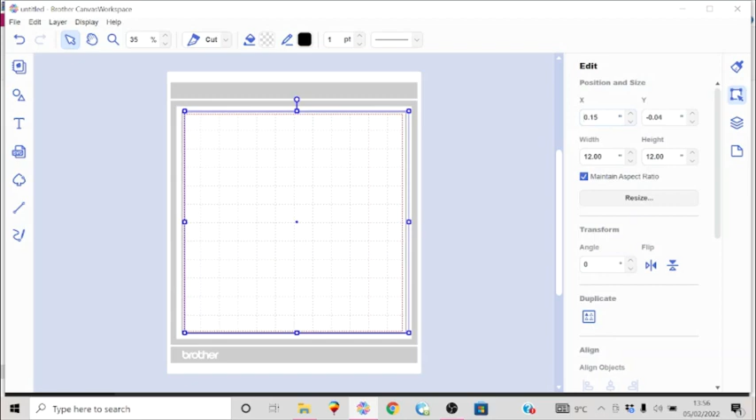Go back again, do that. We zoom in, we'll see that that is beyond the cutting area, which is this red dotted line here. The cutting area for the machine is actually 297 millimeters, which is 11.69 inches. That's clearly too large for that.

So it needs to be no more than that, and that's really taking it right to the very limit. So you can't be any wider than 11.69. I'm going to reduce this 12 by 12 to a more manageable size, but I'm not going to reduce it until I've completely followed all the guidelines in the pattern that I'm following. So all the cut lines, all the score lines, everything will be completed first.

Then I'll select everything and reduce it. I'm going to resize it to 96%, which will bring that, and if I just do that now, I'll show you. So we've taken it down by 4%.

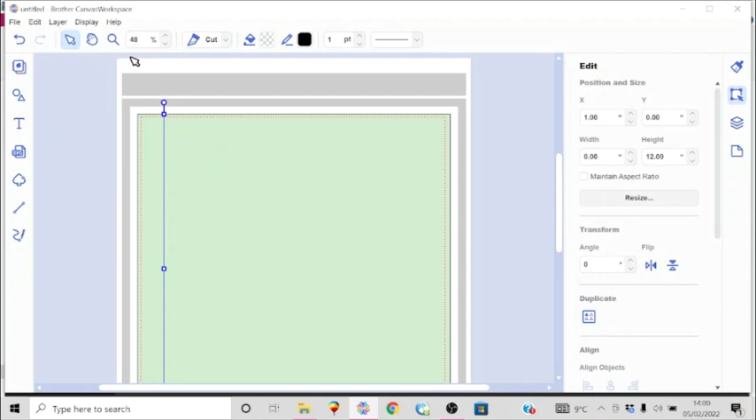So this first score line now needs to be turned into a dash pattern so it doesn't completely cut through. I'm just going to put these score lines in, using that third one down. We want to place that in position.

So just highlight it, go to edit, and then place it at 0.75, which is 3/4, and at 0. So it's at the top, and it's 3/4 of an inch in from the left.

The next score line is going to be at 2 3/4. So duplicate your score line, change the position to 2.75 and 0.

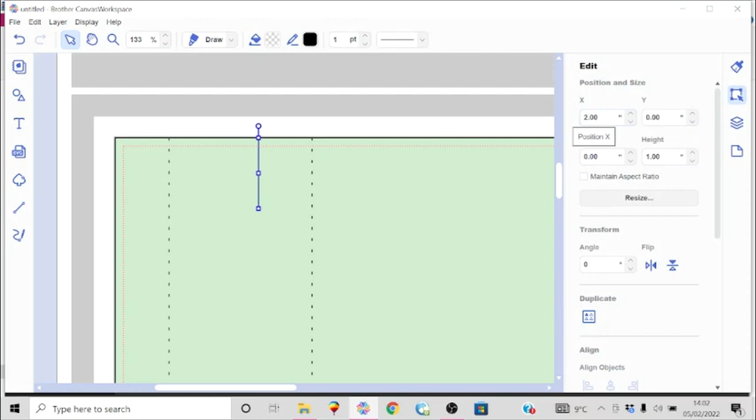Now I'm also going to put a little tick mark in here as a reminder of where I want to take a piece out of this, because we're going to cut out the top portion of this base. I'll actually turn it into a draw so I'm not accidentally cutting that out, and I'm going to place it at 1.75, so 1 3/4 of an inch. It will all become clear in just a little bit.

So I need to do these same measurements but on the right hand side of this piece. I'm going to duplicate that score line and place this again - it's going to be at 0, and it's going to be at 9.25, so 9 1/4 inches, because that is 2 3/4 inches from the right hand side of this 12 by 12 sheet.

Duplicate that and place the next one at 11.25, 11 1/4, which is 3/4 from the right hand side.

I'll do the same with my little tick mark here. I'm going to duplicate that and move this to 10 1/4, because that is 1 3/4 inches from the right side. So we have this now.

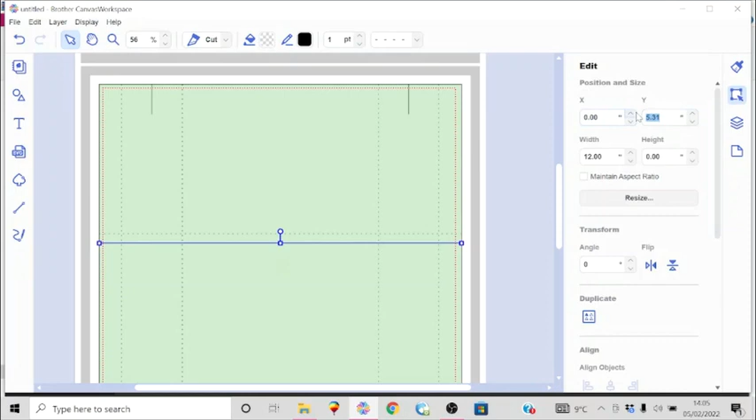The next one we'll duplicate - X will be 0 and Y will be 7, because it has a 2-inch base, so this is 2 inches here. So those are all the score lines that we need for this. Now, as I said, we're going to do some cutting away on this top portion. The bit below the 7-inch score line is going to be left intact just as it is.

So what I'm going to do is bring in another square that I'm going to resize. I'm going to resize this to 1 3/4 in width, which makes it the same as that tick mark we had there. I'm going to take this snapped grid off for the moment. I want this also to be 5 inches in length. So the width is 1 3/4, and the height is 5 inches.

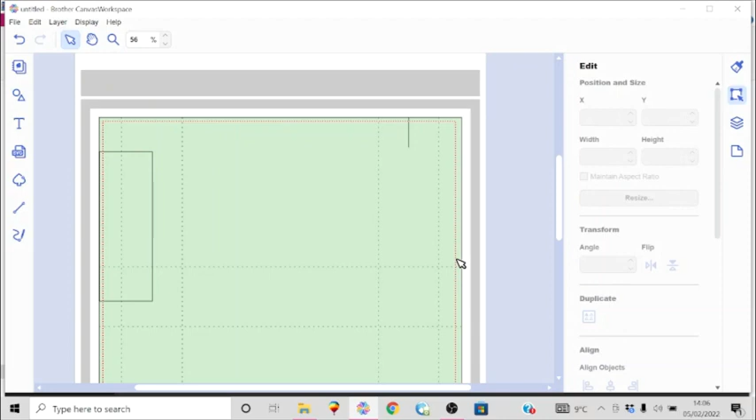So now I can just delete that because I know where that needs to be placed now. This is going to go up here into this corner, so that means it's going to be 0 and 0. If you want, you could even give that some color so you can find it easily.

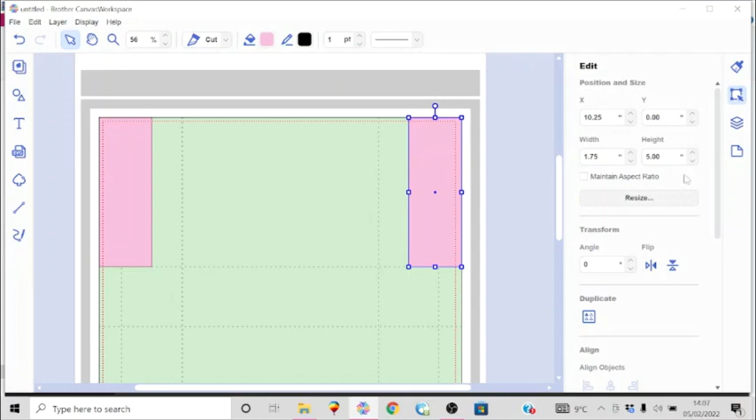I'm going to cut this out as well, so I can delete that. I'm going to duplicate this, bring it over. We're going to put it at the 10 1/4 and 0. Now, we're also going to be cutting this portion out, but I'm going to do that separately after we've done this.

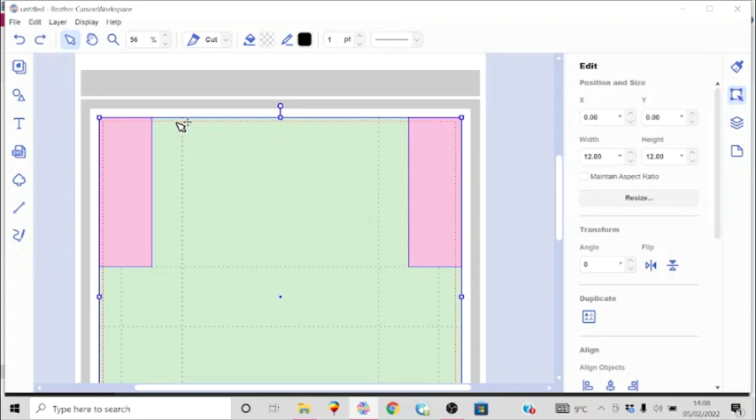So, to be able to subtract these 2 rectangles from the back piece, we've got to unlock that. If you click here - just be sure that's in place, it is 0 0. You can see the green is highlighted up there, so we know it's unlocked. Now we're going to select these 2 shapes - we've got a blue box around that, a blue box around that, and then a blue box around the entire shape. We don't want to select any of the score lines, because we won't be able to cut out or punch through those.

So we'll go to Edit, Process Overlap, and Subtract. So now we have this. And if I take that and place it to the back, you'll see all the score lines are still there. Let's just double check it's still in place at 0 0, and we're going to lock it back again.

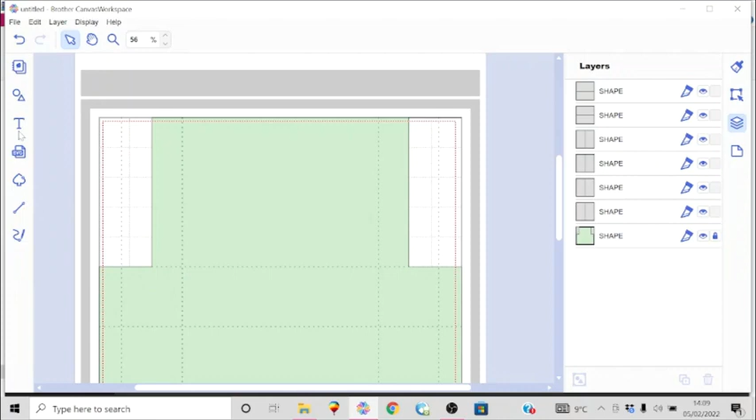Because now we want to bring in a rectangle that will cut this piece here out, and this piece here. So this is 3/4 and this is 2 inches. So we want a shape that is 2 3/4 inches wide and 2 inches high - 2.75. Right, that is going to go here.

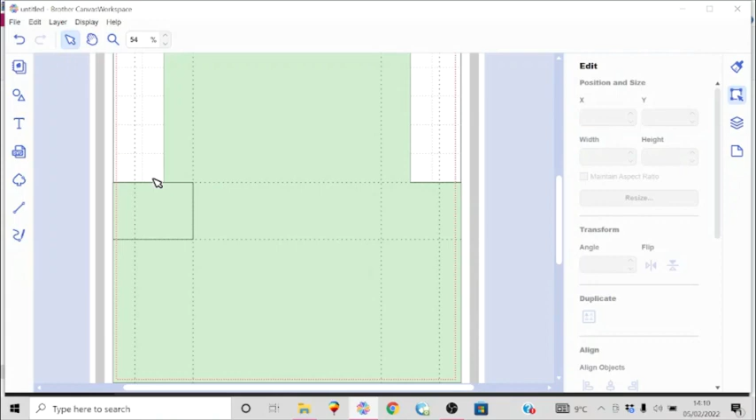So it's going to go at 0, and it's going to go at 5 inches. Again, I can just give that some color. Put that back into place. And we're going to do the same over here, so we'll highlight that, duplicate it, and move it.

To 5 inches and 9 1/4.

Right, so if you look here, you'll see that if you follow that score line all the way down, it's going to go right through there.

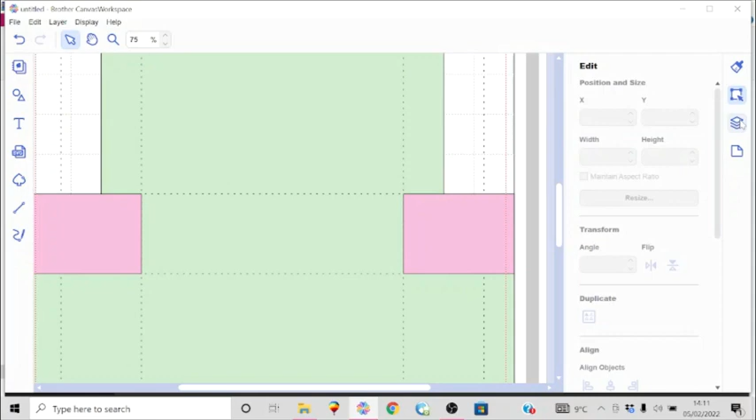So again, back to layers, unlock this piece here, select your 2 rectangles, and you can see the blue boxes around those.

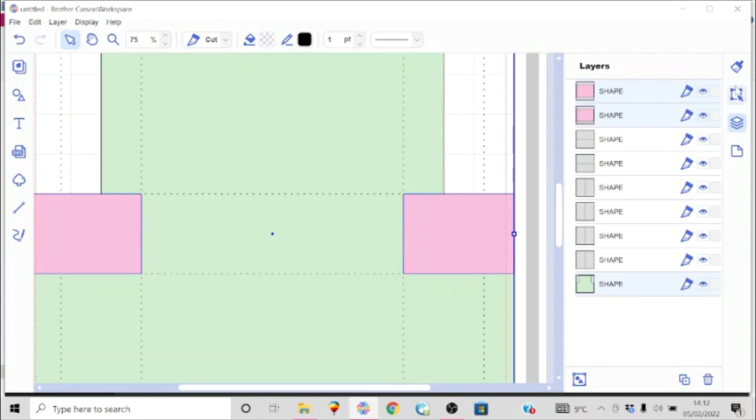Go to Process Overlap and subtract.

Send that back to the back of this. And I'll lock that back again. Let's just be sure it's in the right place. Yes, it is. And we'll lock that back in again.

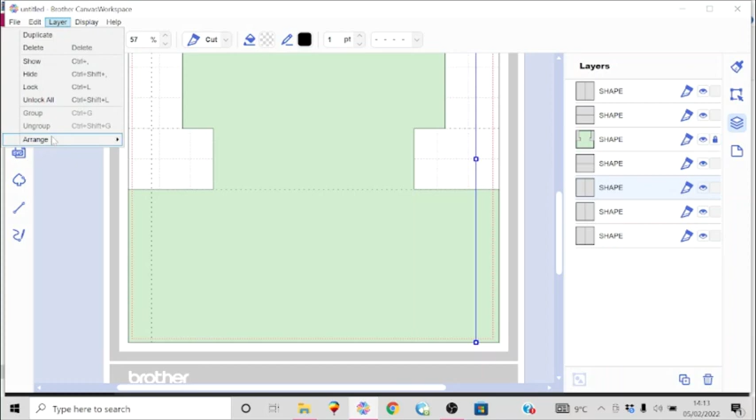So we have these sort of stray score lines here. Let's bring that to the front. Now you can just leave them as they are, because it's really not going to make a lot of difference on the mat. It will cut, but it will, of course, not cut it through. But if you like, and I'm going to do this, just going to grab that and pull it down and resize it.

Okay, I'll do the same here. This piece.

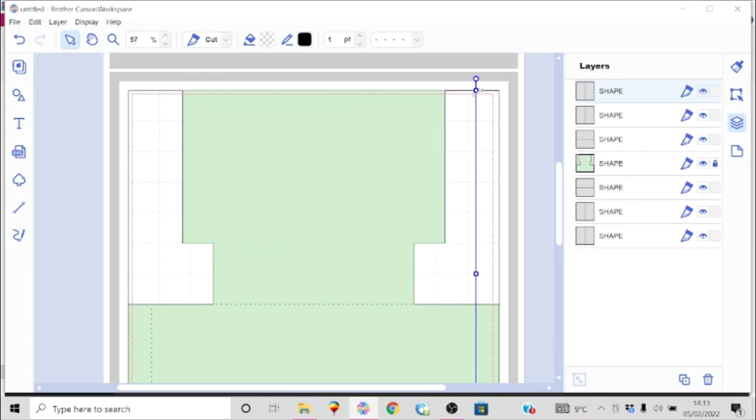Now for our lid, we want to make that 1/8 of an inch larger than our base. And remember, our base is 2 inches in depth. So we want to make this 2 1/8 inches rather than 2 inches.

So we'll start with the basic shape of this, which is going to be in width, it's going to be 10 7/8, so that is 10.875. And the height is going to be 6 3/8, so that's 6.375.

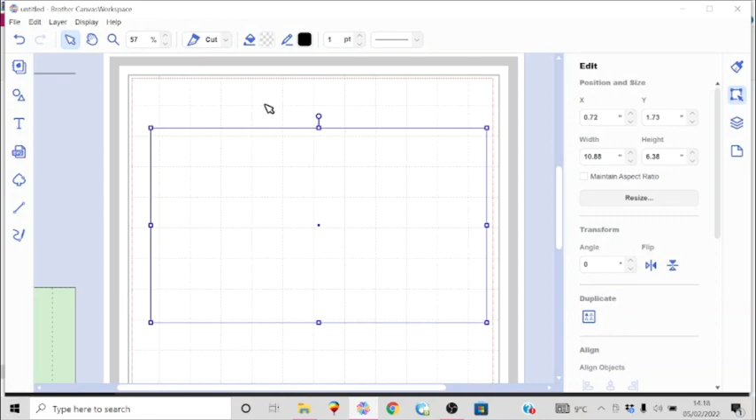Give it some color. And I'm going to place that again in the corner of the mat at 0 on the X and Y axis. And I'll lock this into position like so.

Now, for this, we're going to actually make tabs in each of these corners to bring in a square that is 2 1/8 inches. So 2.125, which is 1/8. 2.125.

That is going to go into the corner here. That's going to be on this corner and then the bottom two as well. So that will go at 0 and 0.

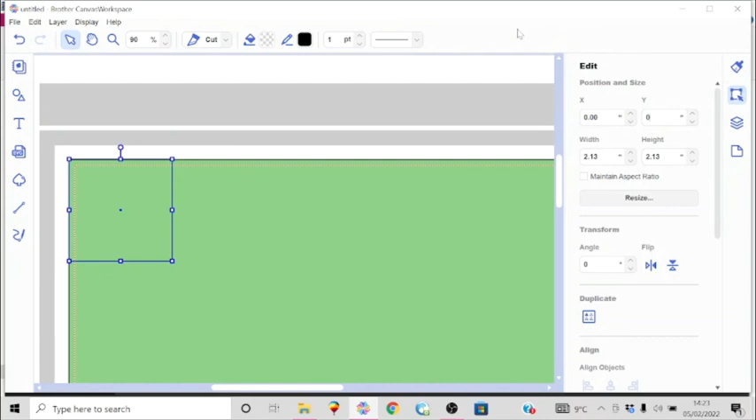Next, I'm going to double click on that and expose the node. So I've got the path editing tools, and I'm going to remove this point here, because when I remove that point, it's going to shift this line over to here and form the triangle. So there is my triangle.

If I just give it some color, you can see. And it's here in the corner, or it will be in a moment. So I'm going to place that in that corner.

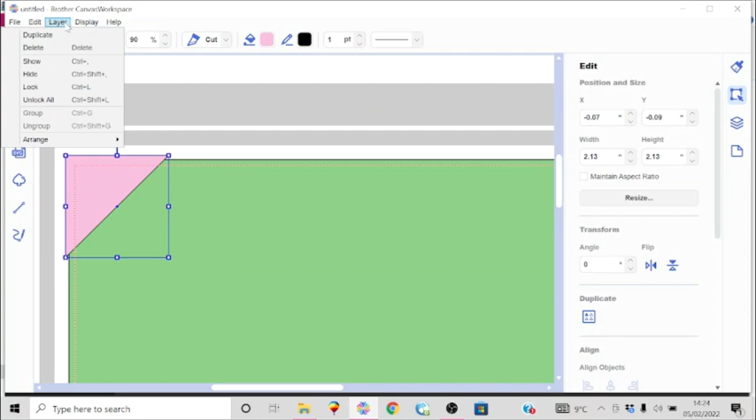But I'm also going to duplicate it, so I've got it available for the other side. And on this side, we want to flip it over so it's mirrored. That's going to go over there. So this one we'll place first at 0 and 0.

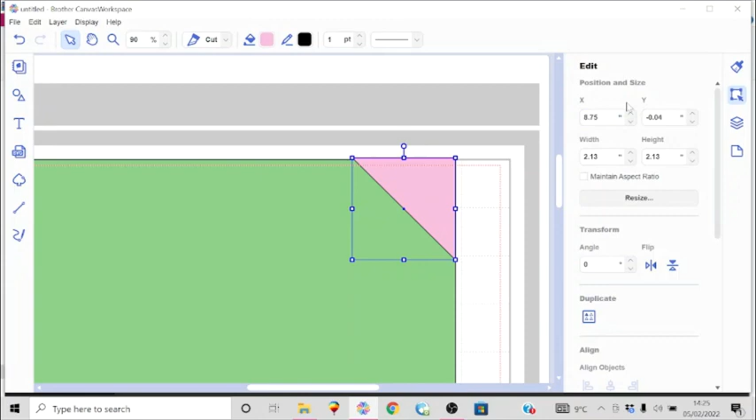This one is going to go at 8 3/4, so that's 8.75. And 0.

What I can do now, though, is to go ahead and select both of these. And duplicate them. Just group them. We'll have them for the bottom down here. So I can flip them vertically.

That one is 0 and 4.25. And so is that one. 4.25.

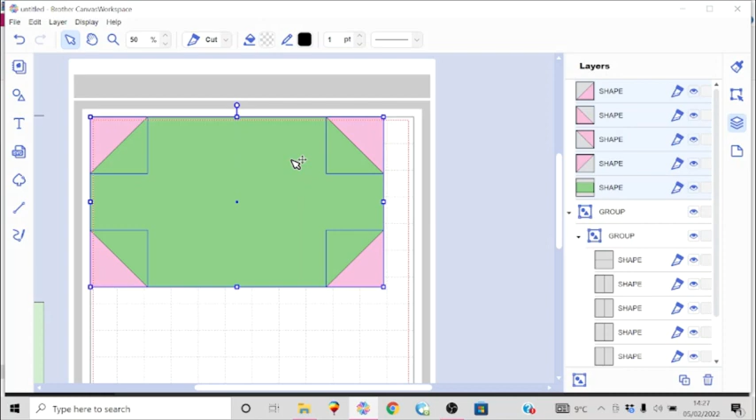Right, so we have those into the corners. We can then unlock the background, select it, go to Process Overlap, and remove those corners. So these have now been removed.

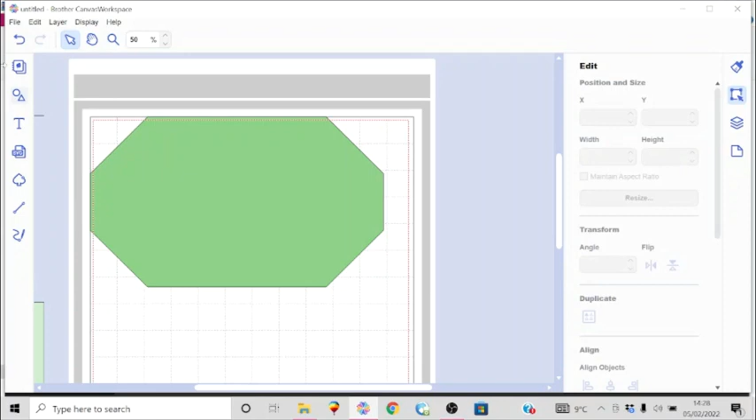So we can put our score lines in next, and we'll make sure that this is still in the right position. Lock it in place. And then I'll go back and put my score lines in. You could do the score lines first if you wanted and then cut out the corners. Either way, it will still work out exactly the same.

So now we want to put in our score line 2.125, which is 2 1/8 inches. And in fact, all the sides will be scored exactly the same. So I can use my path tool here.

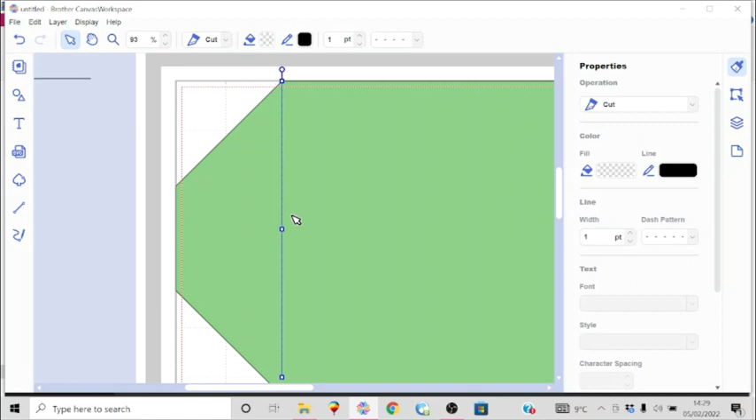I'm going to place that at 2.125 and at 0. Make it a dash pattern. You can make that a bit longer. 6 3/8, so 6.375.

Right, so that is our first score line. I'm going to repeat this. So we'll duplicate it, and we're going to take it to the other side. That is going to go again at 0 and at 8 3/4. So 8.75. Those are the vertical score lines.

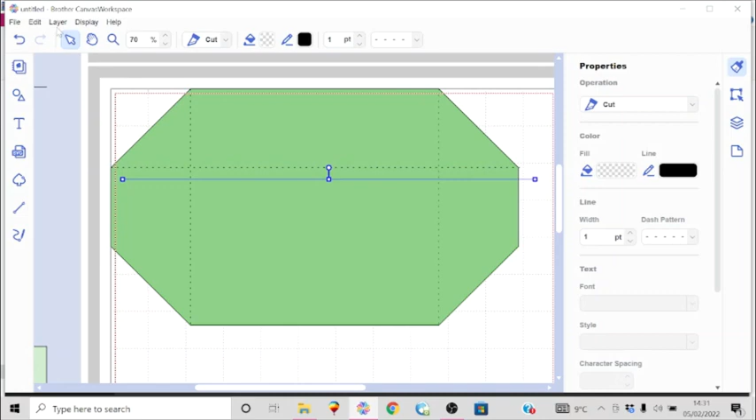The vertical score lines, those are the vertical score lines. The horizontal score lines are going to be at 2 1/8 and 0 for the X. Repeat that. Actually, let's go ahead and make it a dash pattern first. And then we'll repeat that. And place it at 0.

And then we'll move this. Take that off. So this is going to go at 4 1/4, 4.25 and 0. Right, so there is the lid so far.

Now we need to put a cut line here because we've got to free up this tab. So we want a cut line here, we want a cut line here, and we want the same on this side. So that will free that tab up.

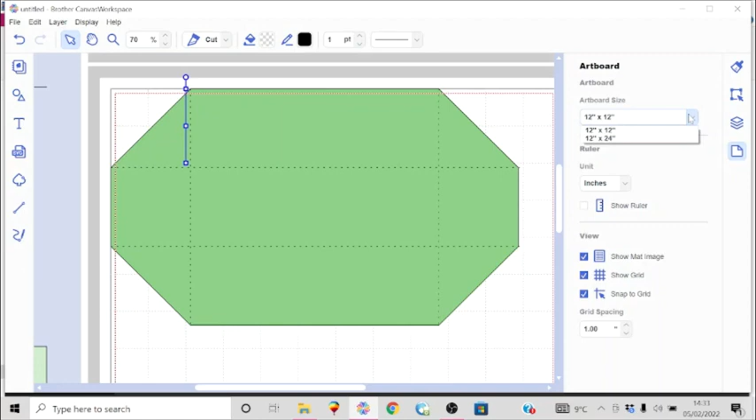So this edge here is going to fold over inside like that. So I'm going to make another score line, or use the path tool again, to make a straight cut line. And that's going to be 2 and 1/8 inches in depth, so 1, 2, 5.

That's going to move into where this score line is at the moment. So how I think I'm going to do mine is I'm going to go ahead and grab that score line and pull it in so that it's underneath this set of score lines, this score line here.

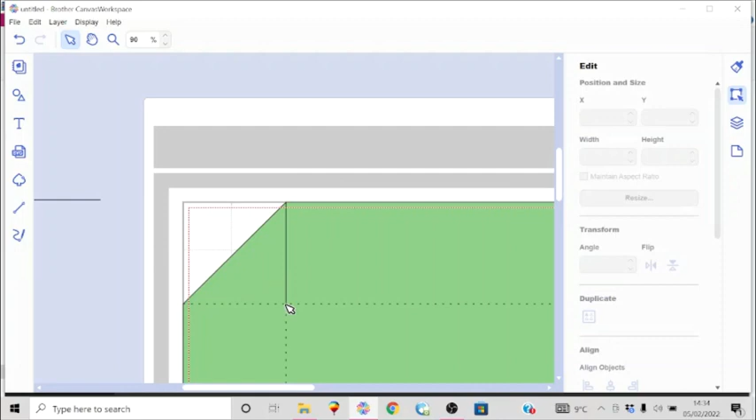So then now I can move this into position, so it's 2.125, and that will be my cut line. So it's going to cut right through here and stop when it gets to the 2 1/8 inch score mark.

So we'll do the same, duplicate that. And I'm going to move it down to here so I can go ahead and reduce that. Pull it up. Doesn't have to be exactly the 2 1/8, but just so it's in between there.

This is going to go four, 2, 5... 2.125... there we are, 4.25.

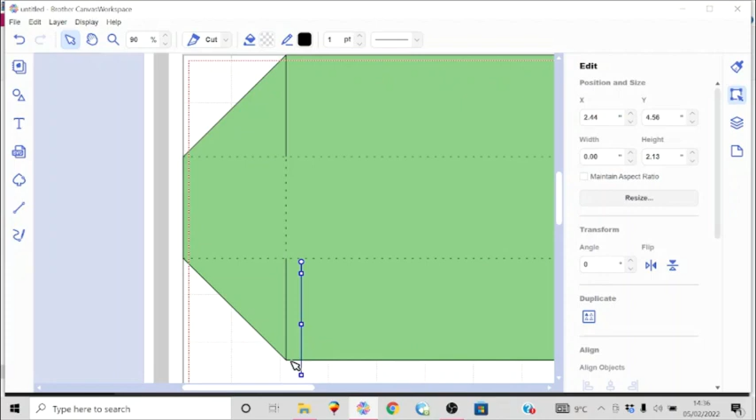So this is going to be 4 1/4, and the X is going to be at 875, like that. So we can go ahead and move that dotted line up. We'll move it down here.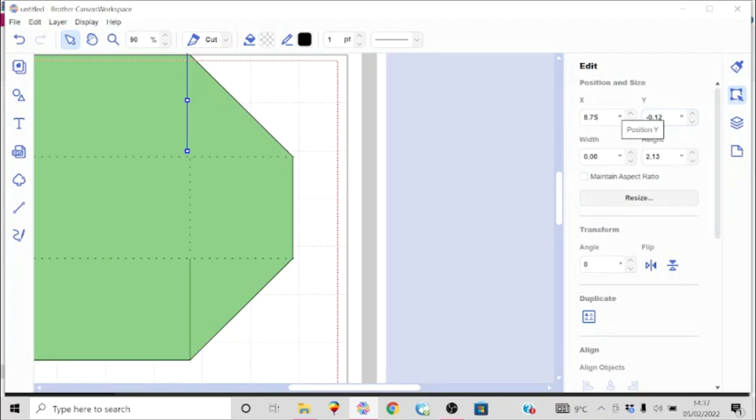And we can duplicate this one. It's going to go here at 8.75 and 0. There are all our score lines and cut lines in place.

Just going to cut here, here, here, and here. And then the rest will all be your folded score lines. So you want to just go ahead and group all those together. And then I'm going to unlock the shape.

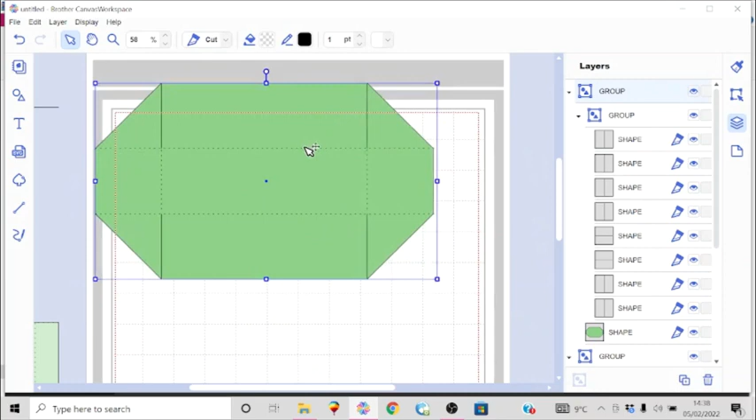Group those, and we have our lid. So we just move that off to the side.

Next is the large pocket, and that is going to be a piece that measures 8 3/8, so that will be 8.375, and it's going to be 4 inches high. Get that color again.

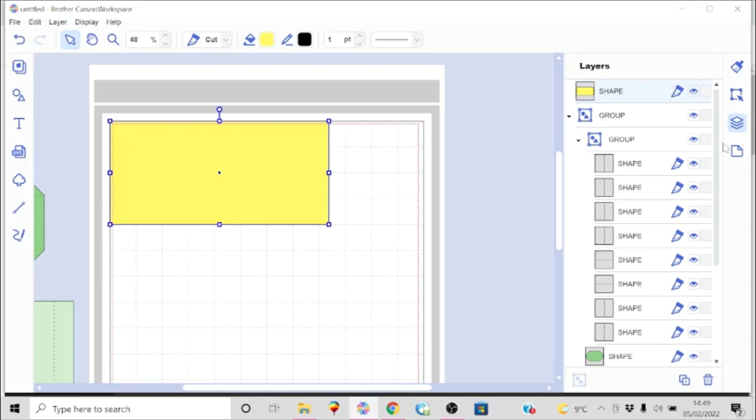So let's give it something else instead. Then we'll place this at the corner and lock that in place. Then I can go back and do my score lines now.

This has just 3 score lines, and they're going to be on 3 sides. So there'll be a 1-inch score line at either end, and then on the long side here. So we're going to make our first score line. It's going to be another dash pattern, and that is going to go at 1 inch.

We'll duplicate that, and we'll put it to the other side, which is 0, and that will be 7 3/8, so 7.375.

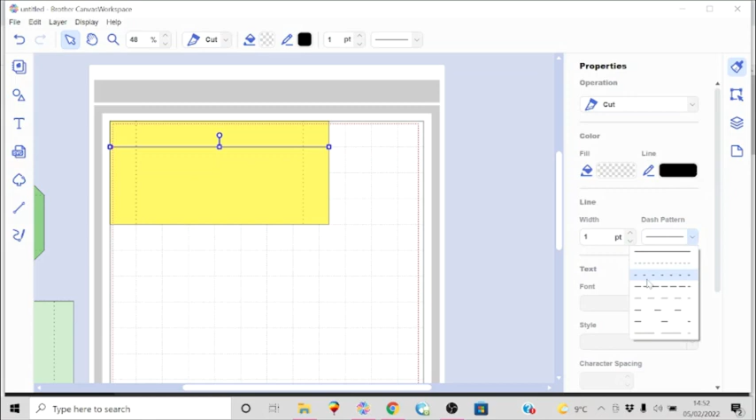To draw a horizontal line, that will be at 0 and 1 inch, or you could put it down here, in which case it would be 3 inches. It's just... 8.375. That is also going to be a dash pattern.

Right, so far we have that. Now what we want to do is actually chop out these 2 corners here. So those are 1 inch. So we'll bring in a square, resize that to 1 inch.

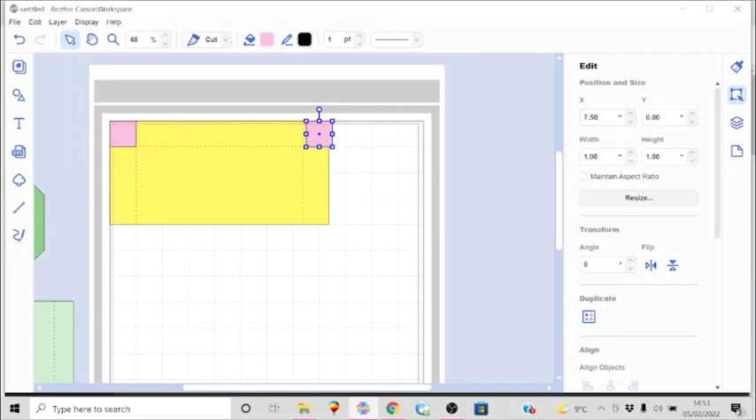To place that in the corner, take that snap grid off. So 0, 0 is where it's going to go. Give it some color so we can see it. I'm going to duplicate it, and I'm going to put it on this end, again at 0, and at 7.375.

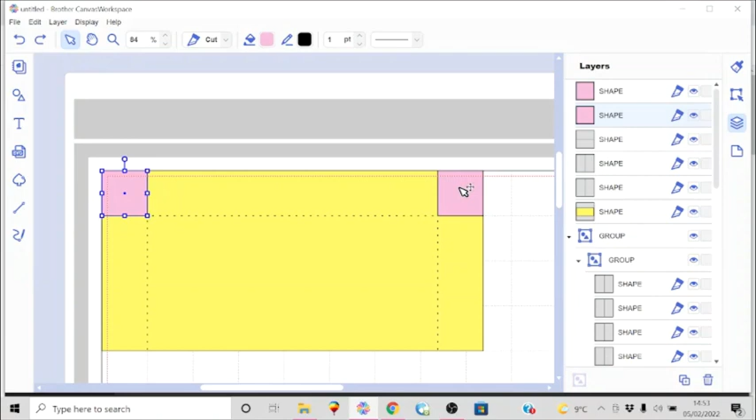You can see that now. Go to layers and unlock the shape. Then we can select these. And our shape for our pocket, and we'll go to Process, Overlap, and Subtract. So when you send that to the back now...

See these score lines, and this score line actually is extending. Just lock that back again. That score line there is still extending beyond here. So if you want to, you can just pull that in so that you don't have that trying to cut through there as well.

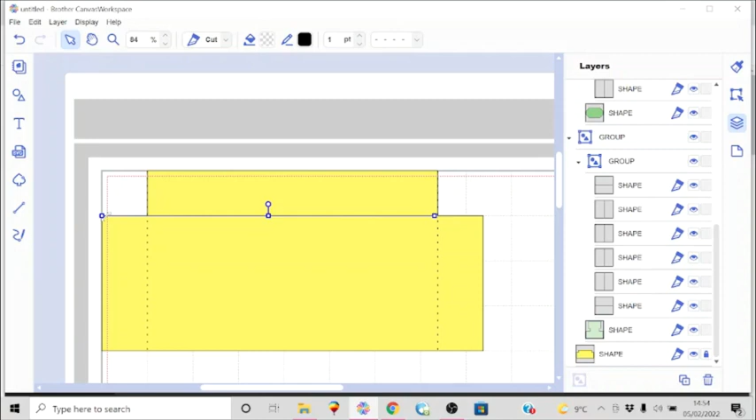So there we have our shape. We can group all our score lines, lock that, and then group all of our large pocket. So that's the large pocket done, that quick. Next is the medium pocket, and the medium pocket measures 5.5 by 2.5.

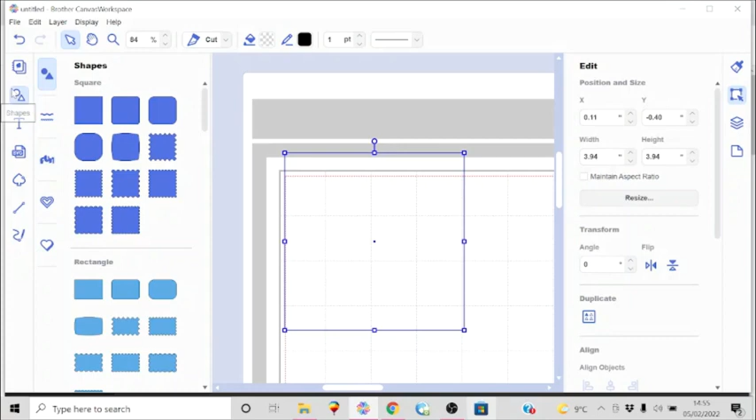We'll go back to Edit, bring in our square. I'm going to change this to 5.5 by 2.5. Again, we're only going to score on 3 sides, but in this case there will be 2 score lines, one at 1/2 inch and one at 1 inch. So let's give this some color.

Place that at 0. Okay, and lock it. Then we can bring in our score lines. Make that 2.5. Right, that is going to be a dash line.

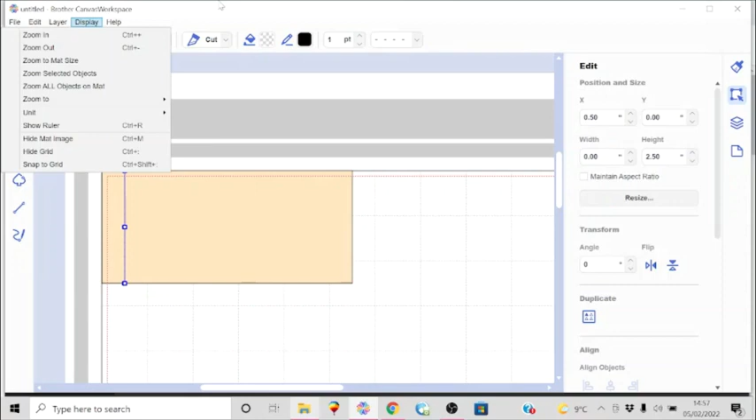We're going to place that at 0.5. We'll duplicate it. And the second one is going to be at 1 inch, so duplicate and place it at 1 inch. Then we will duplicate that. I'm going to bring that over to the right hand side, and that will be, since this is 5.5, this will be at 5.

Duplicate that. 0 and 4.5. Right, so we've got 1/2 inch, 1/2 inch, and another score line at 1 inch.

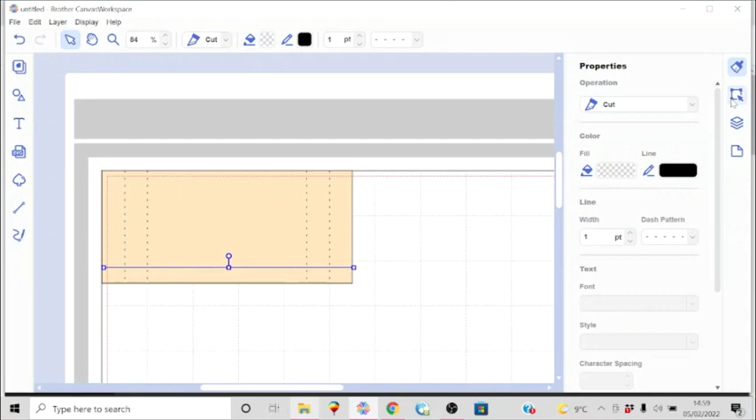And then for the other side, we simply want a 1/2 inch, so we'll turn that into a dash line, place it at 0, and this way I just put it at 0.5. So it's there at the 1/2 inch mark.

So again, we want to take this portion out so that we can make these. This will just be a tab. This will be a tab here. So for that, I'm going to bring in another square and resize that to 1/2 inch in height, and... oh, I'm sorry, 1 inch in width.

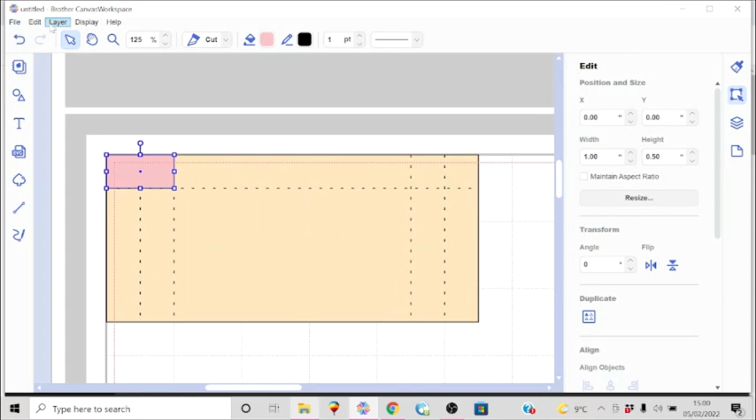There we are. So that's 1/2 inch, 1/2 inch. That's 1 inch there. And that is going to go at 0. Then we'll duplicate that, and we'll place that at 4.5 and 0. So into those corners there.

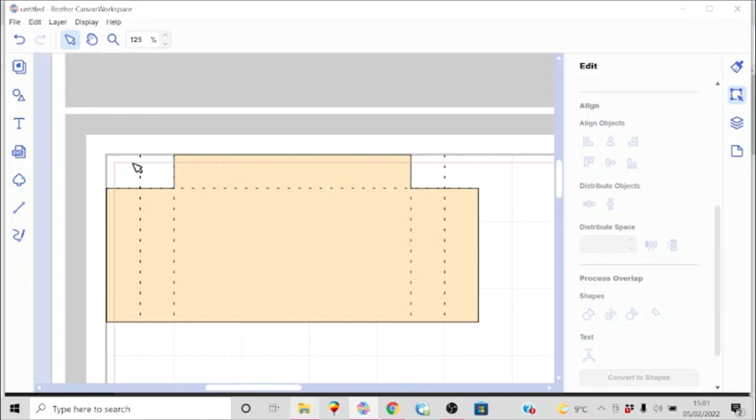Then we can unlock our shape. We can select each of these as well as our background. Go to Process, Overlap, and Subtract. So we can send this to the back again. And then we can lock that back down. Be sure it's still at 0. Lock that back into place.

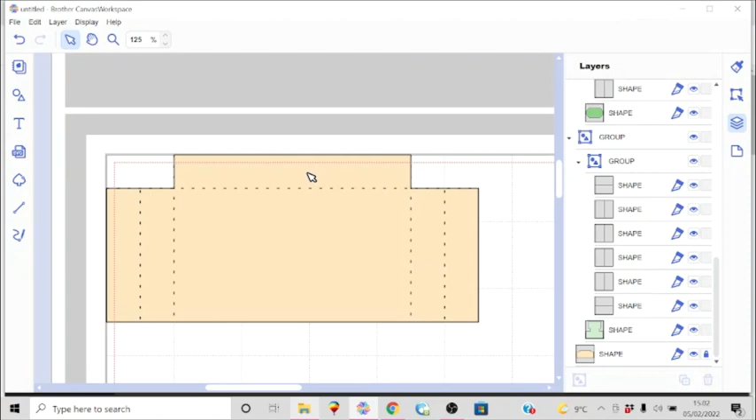I can grab these score lines and resize them so they're under there. Then I can select all the score lines, group them, unlock the shape, and now regroup everything again. And there is our medium pocket done.

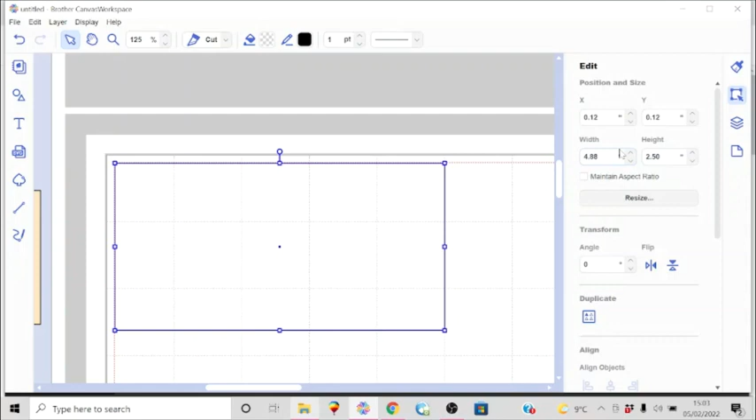So we have next a small pocket. That is going to be four and 7/8 by 2.5. So 4 and 7/8, that's 4.875, and 2.5 inches in height. So it's the same height as the medium pocket. Give it some color.

Place it at 0. And we'll secure it by locking it in place. And then our score lines for this are going to be the same as for the medium pocket, so that means 1/2 inch and 1 inch. So make that a...

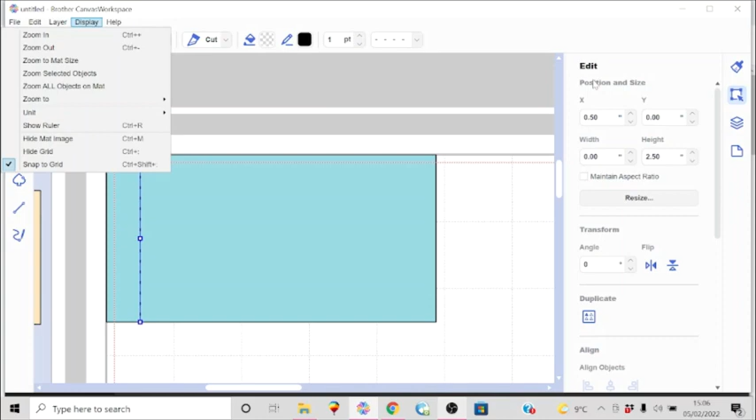Dash pattern, and place it at 0.5 and 0. There's our first score line. Then we'll repeat that and place that at 1 inch.

And we'll repeat that one. That'll be 4 3/8, so 375, 0, and then we'll duplicate that one and place that again, and 0, and then 3.875. So that's 1 inch and 1/2 inch in from either side. Then we need a horizontal line.

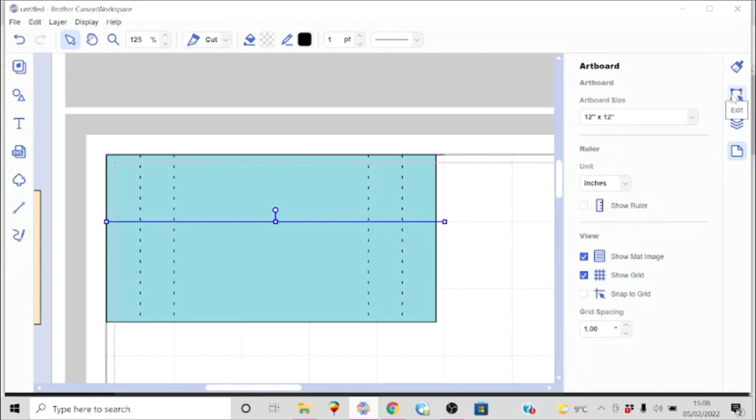Take that off. And that is going to go at 0.5. Make that a dash as well. Okay. Then we need to take these corners out again.

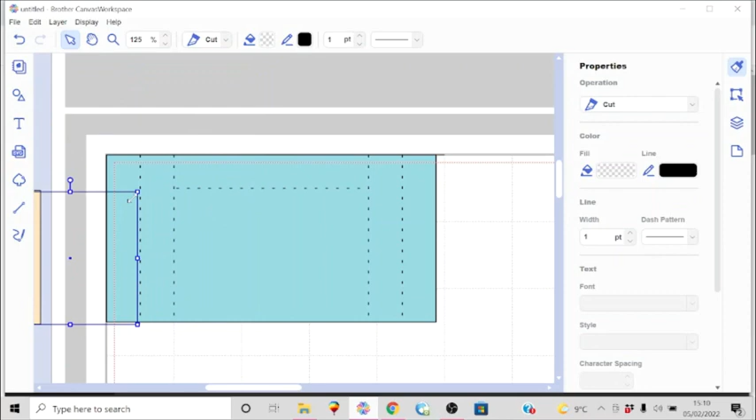We can go ahead and just move that in if you like. Bring in our 1 inch square. Actually, it's got to be one by 1/2 inch. Okay. And that is going to go in the corner at 0. And then on the other end, duplicate that.

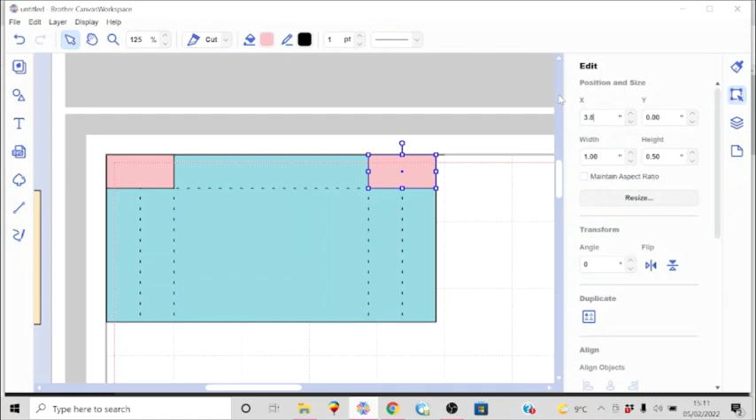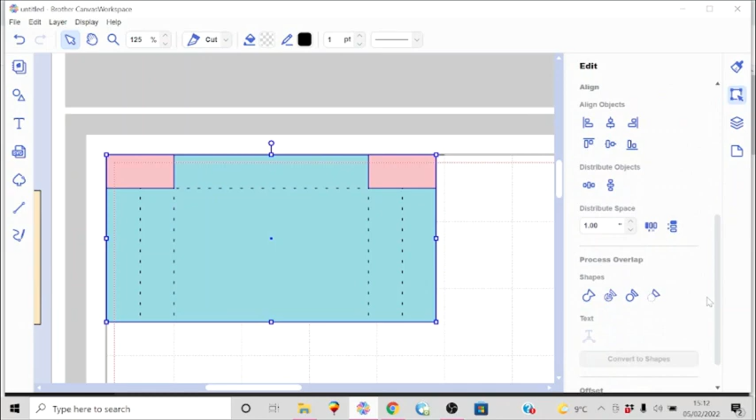Now we can unlock - maybe we didn't lock it. I locked that, let's get back here. No, it's locked, okay, so let's unlock that. You can always go up here as well and unlock everything if you want to, but I've already unlocked that now. So we'll select these pieces, we've got the blue boxes highlighted around each of those. Go to Process, Overlap, and Subtract, and then we can send that to the back.

I'm going to do back and lock it once again, and then I can move those score lines down like that. So now we can group all our score lines, unlock the pocket, and group everything together, and then we can just move that aside.

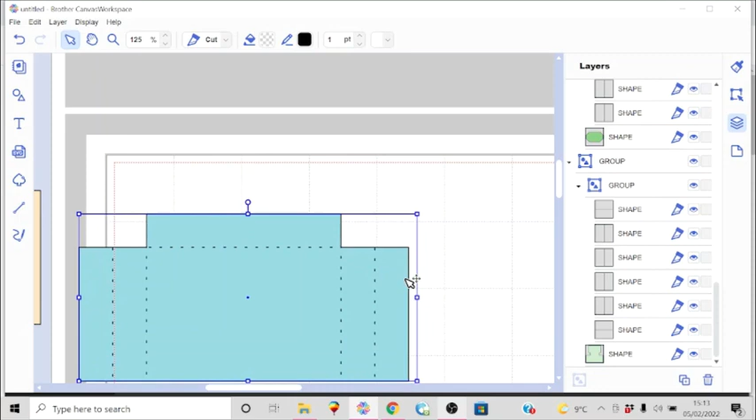Next, I'm going to make a little pocket that you could use to place stamps or just tuck in anything else that you wanted. So I'm going to bring in a square here, and I'm going to resize this to 2 3/4 by 2.5 inches in height.

That little bit of color as well. Let's choose that, we'll place that up in the corner again. We're nearly there, and I will lock that in place and then bring in these score lines. And again, this is going to have just 3 score lines.

So I want to place a score line at 1/4 inch on 3 sides, that is. So we'll place this one at 0.25 and 0. Make that a dash pattern as well. So take that off for now.

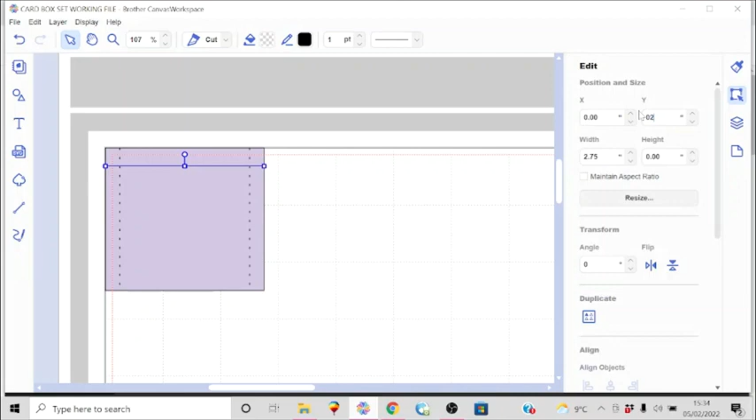And then finally, we need a line that is going to be at 0, 1/4, so 0.25. Like that, oops. Let's go ahead and change that to a dash pattern, and then place it at 0.25.

And then we can remove these pieces here, or you could just wait and cut them off when you get ready to put them down. But we can go ahead and actually make a little tab out of that.

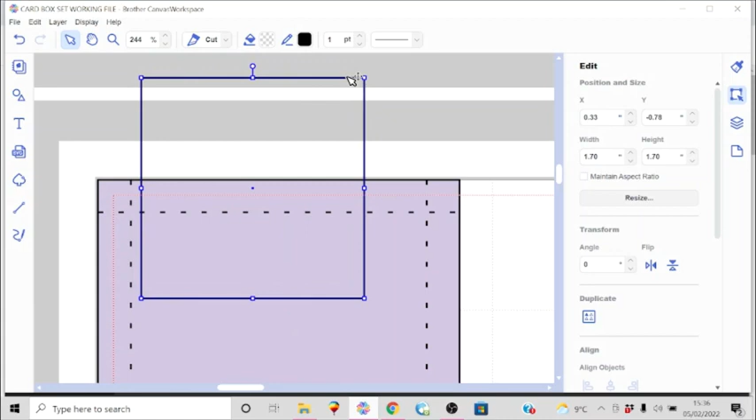So what we'll do is we'll bring in a square that is a 1/4 of an inch. That's going to go up here in the corner.

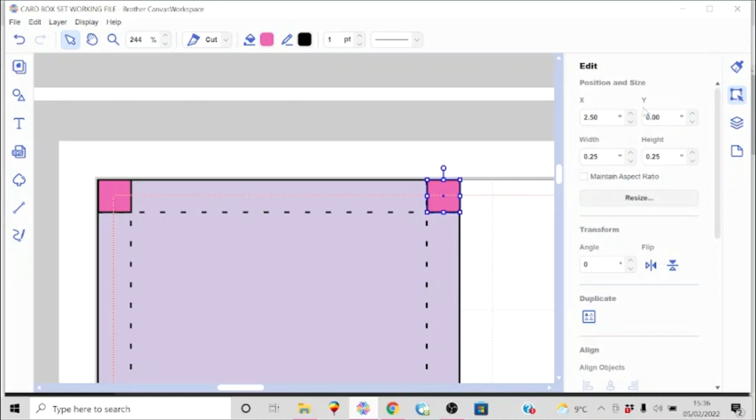Duplicate that and place that on the other side. And we can unlock this, and select, oops, those back, and go to Process, Overlap, and remove those little corners. Send that to the back, and then I can lock this again.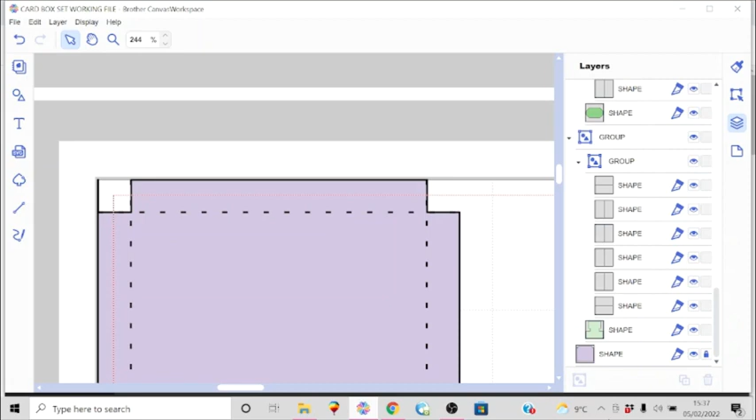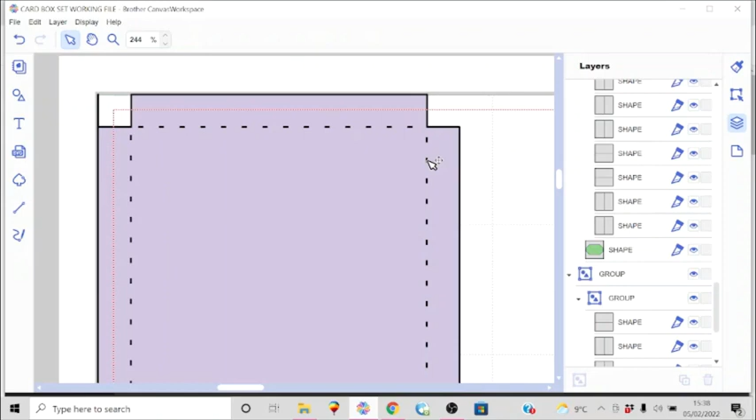And I can resize these score lines. Now we can also, if you wanted to, you could actually angle these now if you like. But I think I would just wait until I was ready to put them on to the base and can make the little tabs then. So I'll, oops, I'll move that. Just pull those down as well.

Okay, so that one should be ready. Oh, there is one more thing I want to do. I want to actually have a little thumb hole here, so it'll be easier to get in and out of this. So this is, as it stands now, the bottom of this little pocket. This will be the top.

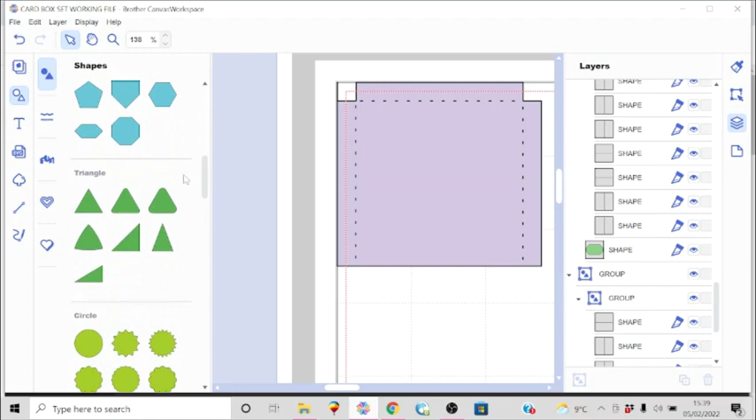I'm going to bring in a circle, should be fine. I'm going to resize this. About 3/4 of an inch should be about right. If you want to be precise, we can just change these dimensions.

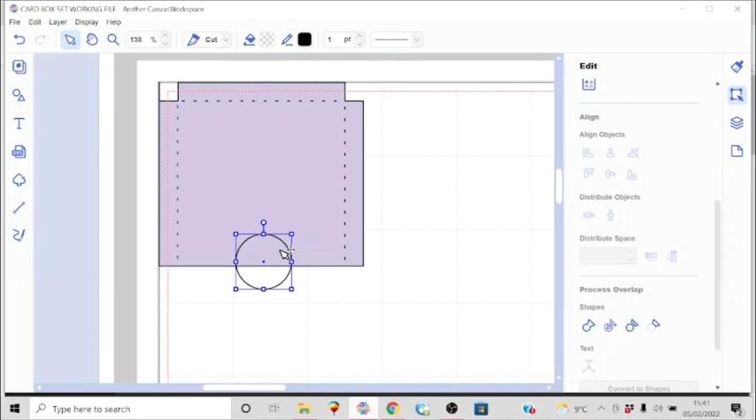I want it to go into the middle of this, so I'll need to unlock this for a moment so that I can place that in the center, and I think I'll try that again. About halfway down should be fine.

So we'll do this, make sure that's in the center, and then I can cut that out. I'll lock this down again. Actually, before I do that, I want to send it to the back. Lock it. Then we can

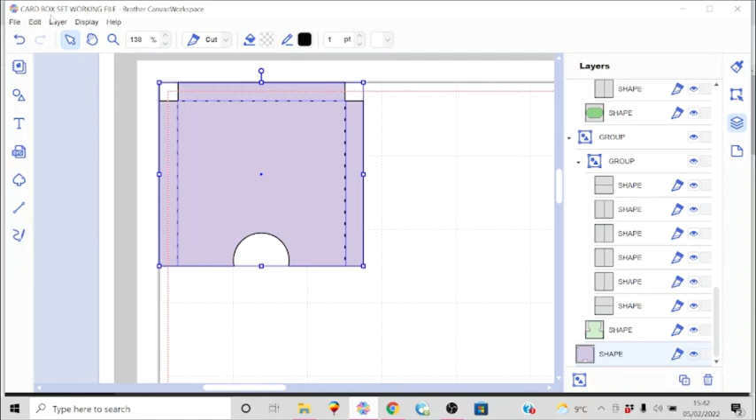Group these score lines here. Unlock it, and group the stamp pocket. So that's done.

Now the last thing I want to do, because it's for the pen holder, I'm not going to do that until I'm ready to actually select my pen so that I can get this size right, and we'll just be making that off of a little offcut.

But now I need to bring in my dimensions for a notepad, or in my case I'm going to use little sticky notes. So those measure 3 by 3, but you might want to resize yours differently. So you might want, for example, to have something that is maybe you have papers that are like 3 3/4 or 3 1/4. We just adjust the sizes to fit.

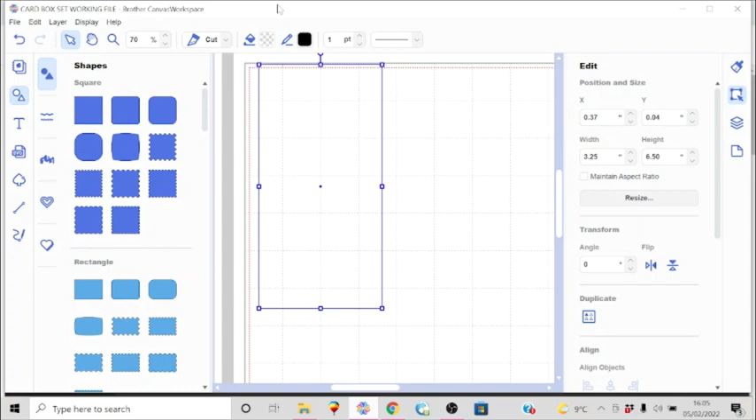So what I want is mine to be 1/8 of an inch clearance on either side. We can bring in a square that is maybe resized to 3 1/4 inches in width, and the length is going to be 6 1/2. Let's give that some color as well, and place that at 0, and then just need for this, after we've locked that in, are 2 score lines.

And the first of these is, just change the length of that, 3.25. The dash pattern. Okay, and that is going to be at 0 and...

3.25. Then I'm going to duplicate that, and this one is going to go 1/4 of an inch away at 3 1/2, so that my 3 by 3 pad will fit in here. You'll have 1/8 of an inch clearance at the sides, at the bottom, and then here it will come up to that score line, and you'll have that 1/4 of an inch spine there.

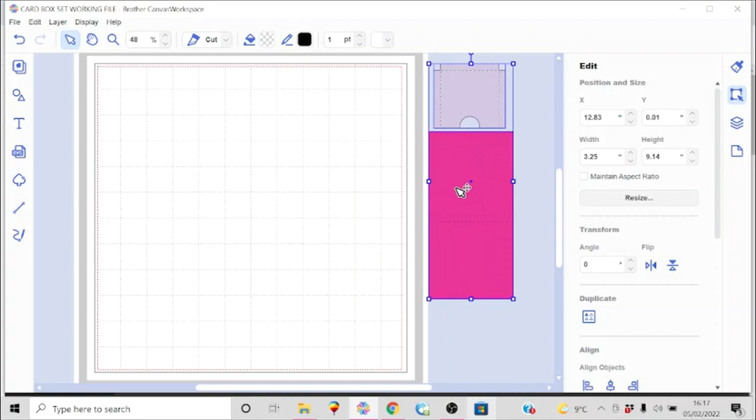So let's bring all of these over into the center here. Right, and I'll go ahead and select all of those, and I can actually group them if I like, just for the moment, and resize them to 96. So by keeping the maintain aspect ratio ticked, then it will change the width and the height proportionally. So 96.

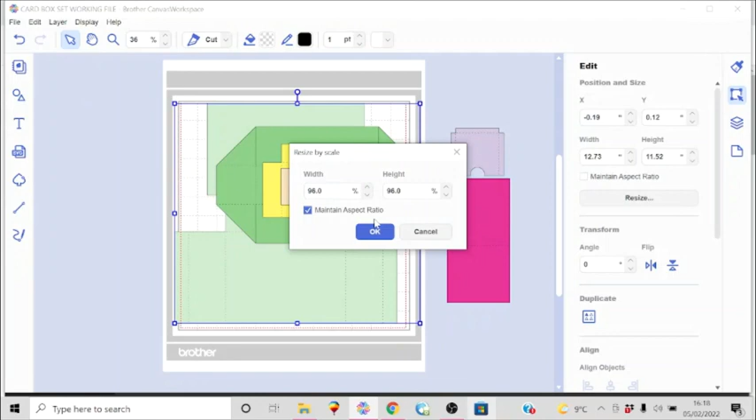Okay. And then when you ungroup this, you'll see that the base is now 11.52. Our lid has also been reduced, as well as the 3 pockets, and then these I've kept the same size. So they'll still fit inside of here, like that. And like that.

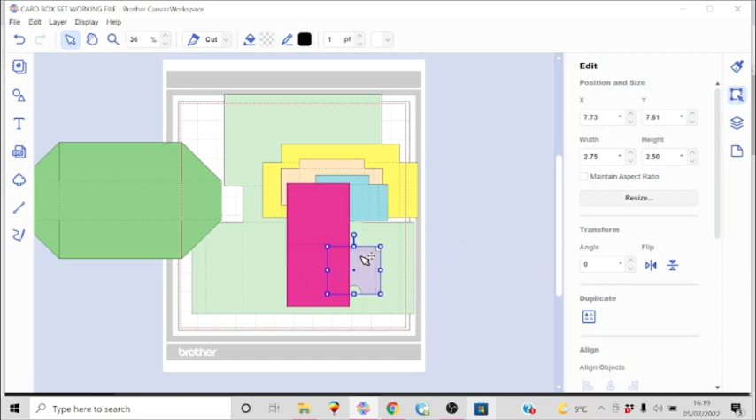Right, so now you can bring everything together. I'm just going to align them. Don't want them grouped, because when I bring them over to the mat to be cut, I don't want that still grouped, because it will just cut it as one complete file, and we don't want that.

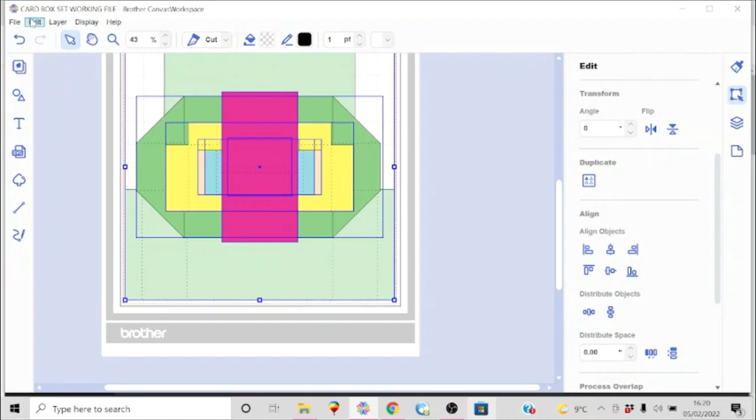So I can just be sure that all that is within that cutting area. I'll save it again, and then I'll send it to my machine. All right, and I'm also going to put it on my USB stick, I think, as well. So I'll do that. I'll export that.

And then what I'm going to do for this is I'm going to make a separate video showing the actual construction. So this is where this is going to end. So you can then go and look at the other video to see exactly how you put it together.